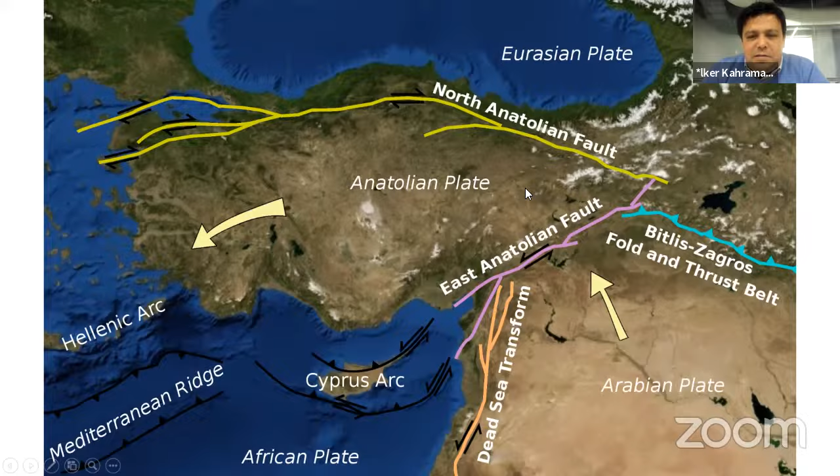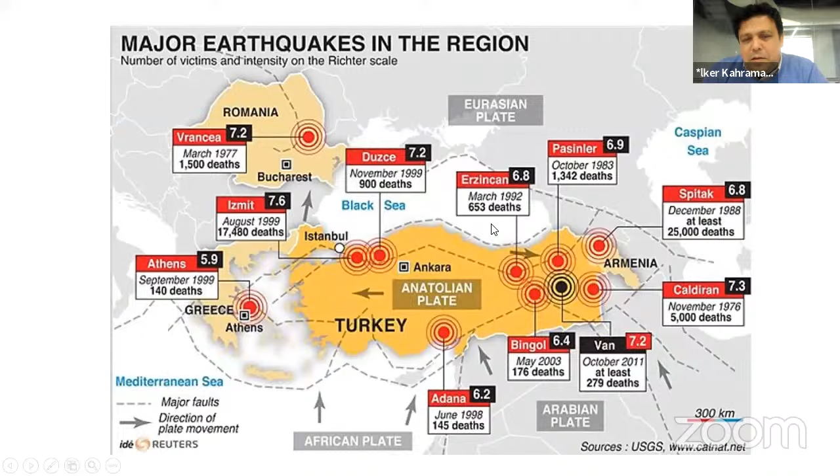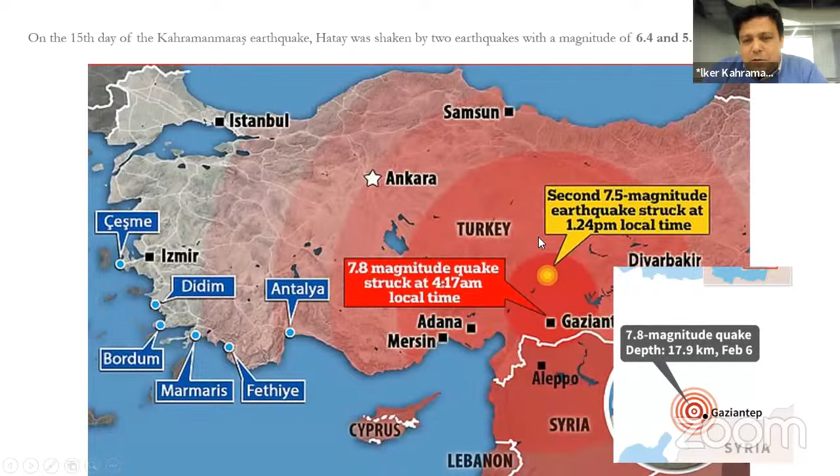Actually, we have some live faults in Turkey, and the East Anatolian fault was bringing the disaster to us. And as you can see, our earthquake zones. And it was not the first earthquake from which we had damage. So we need to learn to live with earthquakes. And we had two really big earthquakes in just a 4 or 5 hour period. And you see 11 cities of Turkey have been affected.

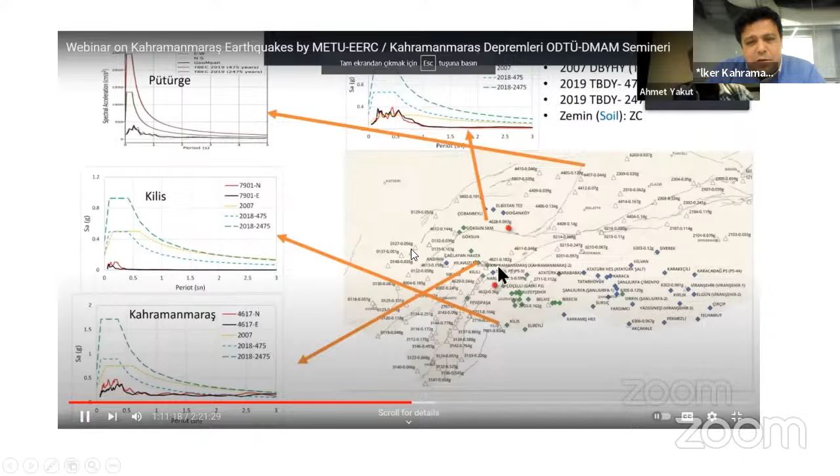And after the earthquake, we were there, but what we realized was really very bad. Now we are still trying to heal our illness, but we have a lot to do. We had a small scale earthquake in Izmir in 2020, and the photos are very similar. And according to lots of different experts in Turkey, our regulations are okay if you just take into account what we faced during the earthquake. But still we are losing lives, and according to the government, it is more than 50,000 people.

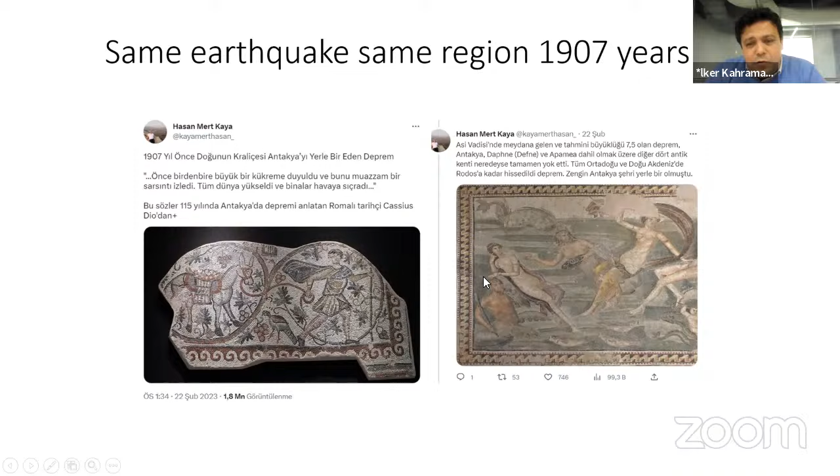And these are some images from 1,900 years ago. It was the same earthquake in the same region. So we know that we are facing it every time. And we have some ruins at the earthquake zone, but we don't want to have them anymore. And if you think about Göbekli Tepe, which is very close to the earthquake zone, we have to understand how to have resilience, because 12,000 years ago we did this in this region.

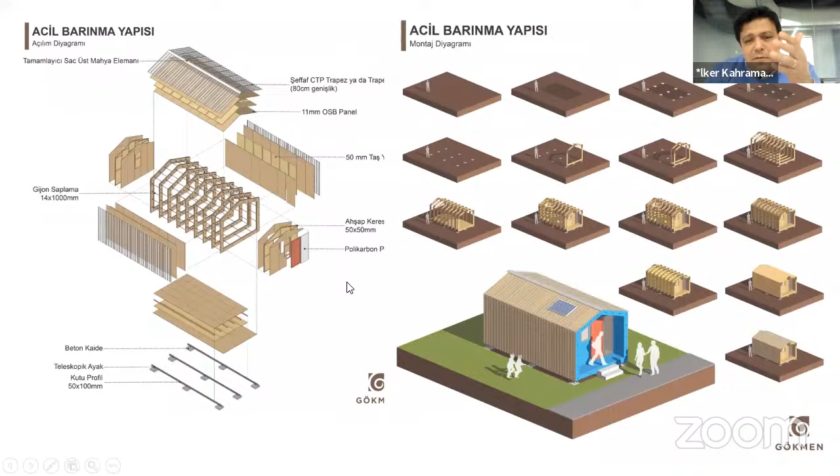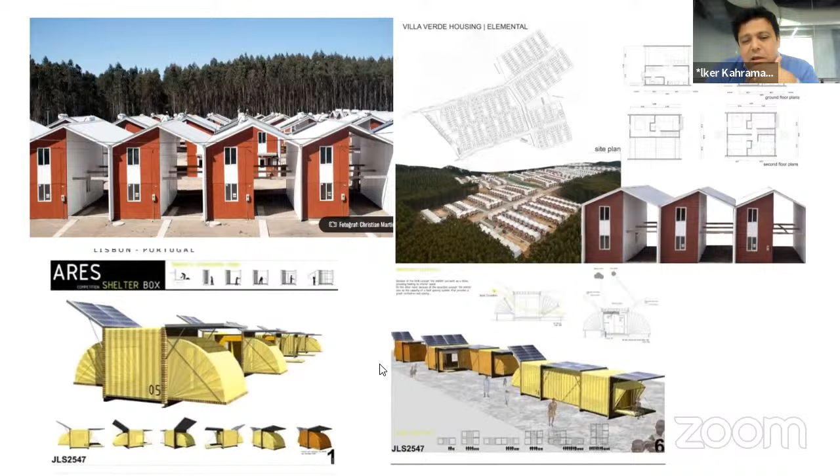And we are dealing with temporary shelters right now. I'm trying to understand what we can do to have temporary shelters, and we are trying to assess what different countries did. For that reason, these presentations will be very beneficial for us. So I just want to leave the stage to Nils Larson. Please, Nils, this is the third meeting we are having all together in order to get an idea about what we can do. And Nils Larson is a very important actor there. So please, Nils, the stage is yours.

Okay. Thank you, Ilker. Am I on audio? Yes, we can hear you. Right, okay. And I'll share screen if I may. If you want, I can share, by the way. Yeah, okay, fine. So we don't see mine yet. There. Okay, we're on. Oh, that's the one you put up. March 20. All right. Do you want me to go on? Hang on, just go a few more slides ahead. A few more. More. Another one. Yeah, okay, so this one is fine.

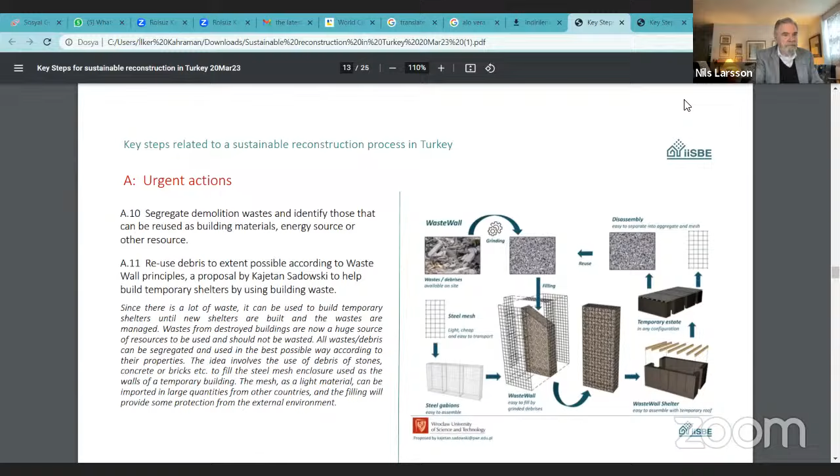Next. Oh, and here, I've mentioned that one of our colleagues, Umit Unver, has helped to establish a zero build organization in Turkey. And that should be a good source of information in the long run on this subject area. Next.

This is what I'm talking about, the synergy zones. Where you have clusters of new buildings, a cluster of 6 to 12 to 15 buildings, let's say, that are located in close proximity, if you start to look at the surpluses and deficits, for example, an office building usually has a surplus of thermal energy, and an apartment building usually has a deficit of that. A school has a surplus of gray water from large roof areas, and a high-rise apartment building or high-rise office has a deficit of gray water. So there are things that can be matched here to make for a synergistic solution.

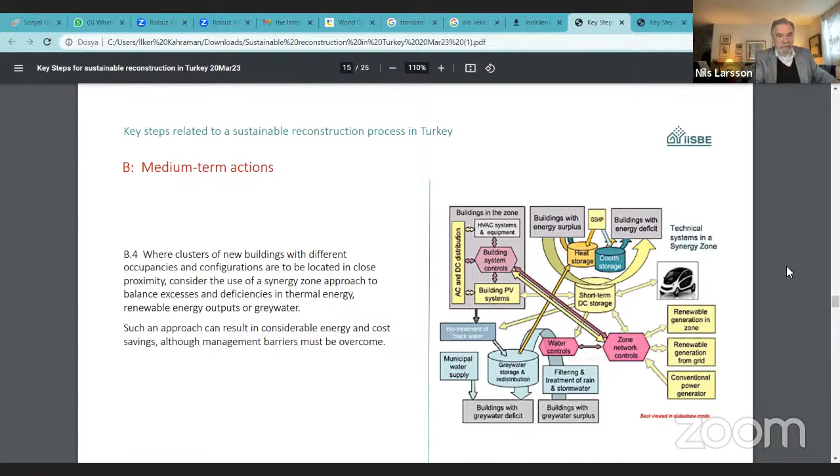We have to, again, obviously, rebuild and repair road, electrical, communication, gas, water, and sewer systems according to the needs of a sustainable urban development plan, with an emphasis on supporting the quality of urban life, reducing energy consumption and greenhouse gas emissions, improving public transport, and minimizing use of private vehicles.

No matter what country you're in, people love their cars. And we have to really, for long-term sustainable solutions, get people to leave their cars and use public transport more. But for that to happen, public transport has to be really available and really high quality.

My wife and I, for example, got rid of our car 18 years ago. We live right downtown in Ottawa, use bicycles, buses, rental cars, and a loan car. We have a person who we exchange with; it's a circular economy kind of thing, where we pay a little bit each time we use her car. It works very well. Establish and maintain databases of operating energy and emissions of buildings and other structures.

Launch training programs for individual workers in small companies to develop skills in high quality and energy efficient construction. In the case of residents who are rebuilding their own homes, which may be in a scattered way, provide small teams of traveling professional support advisors to support these efforts.

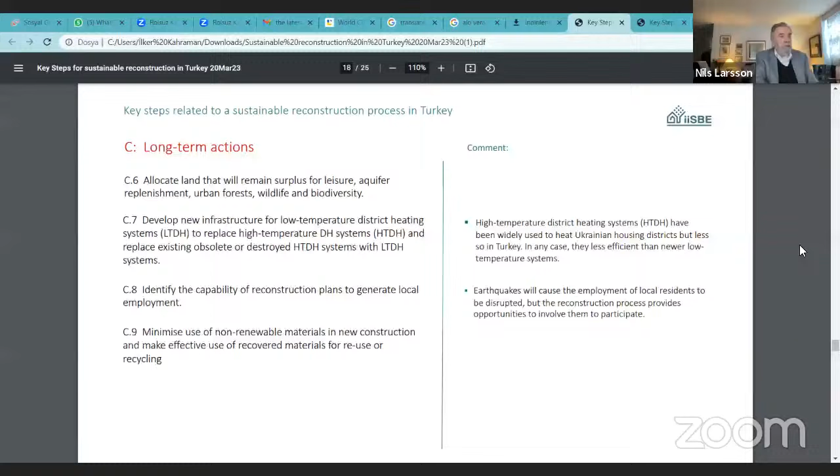Allocate land that will remain surplus for leisure, aquifer replenishment, urban forests, wildlife, and biodiversity. There's a temptation to reuse land that is temporarily vacant for profitable reconstruction, and that's not a good idea.

Develop new infrastructure for low temperature district heating systems to replace high temperature. Now, you don't have much of that. This paragraph I actually developed for the similar work we're doing in Ukraine, where there's a lot of high temperature, very inefficient district heating systems. And I am not sure how much in the way of district heating you have in Turkey, but if you do, then for the long-term solution we have to have low temperature and efficient district heating.

Identify the capability of reconstruction plans to generate local employment. That's another factor. You don't want a lot of outside labor force to come in and build it and leave the locals without work. Minimize use of non-renewable materials in new construction and make effective use of recovered materials for reuse or recycling. Next.

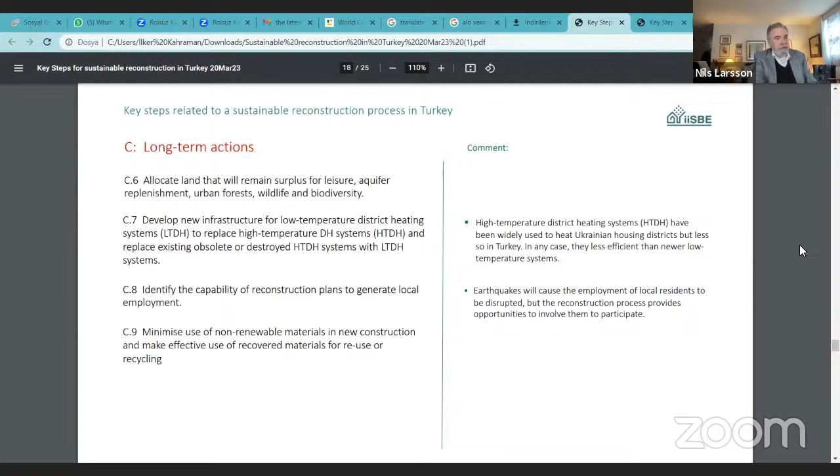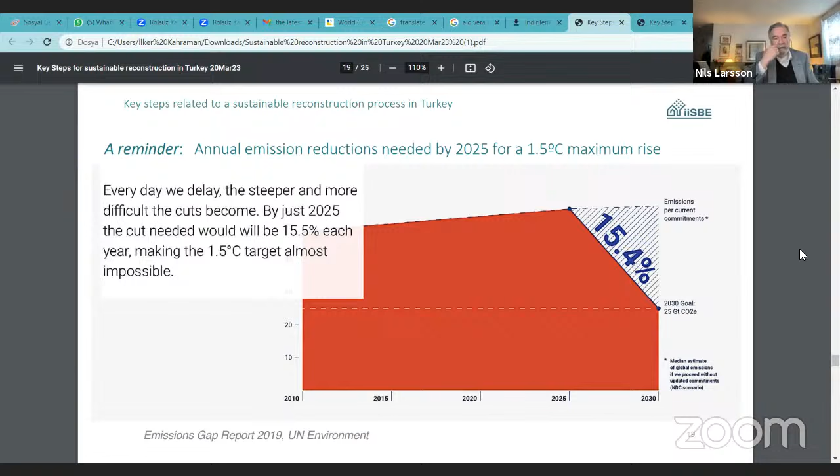Okay, this is a reminder. Each day we delay, and this is the climate change reminder, we have to reduce our emissions drastically, quickly, because otherwise, and the 1.5 Celsius target, of course, is an average over sea and land, and in fact, it's going to be much higher over land. So I think that's it. Or one more. Oh, no, a couple more. Oh, these are appendices. Okay, let's have a quick look at this.

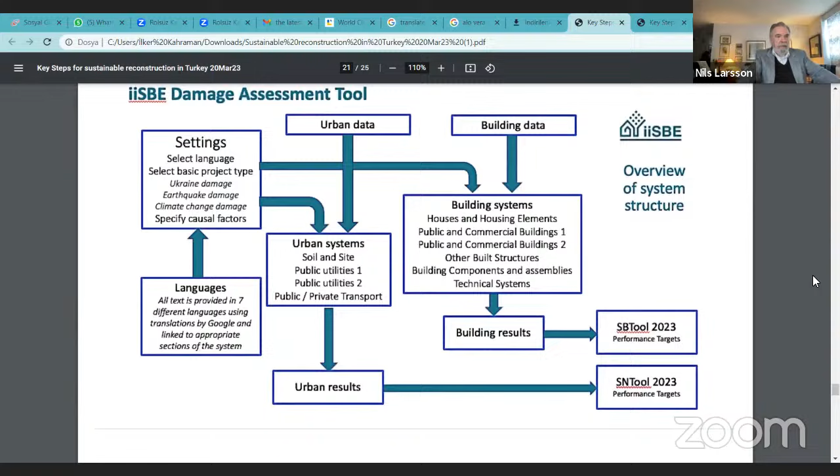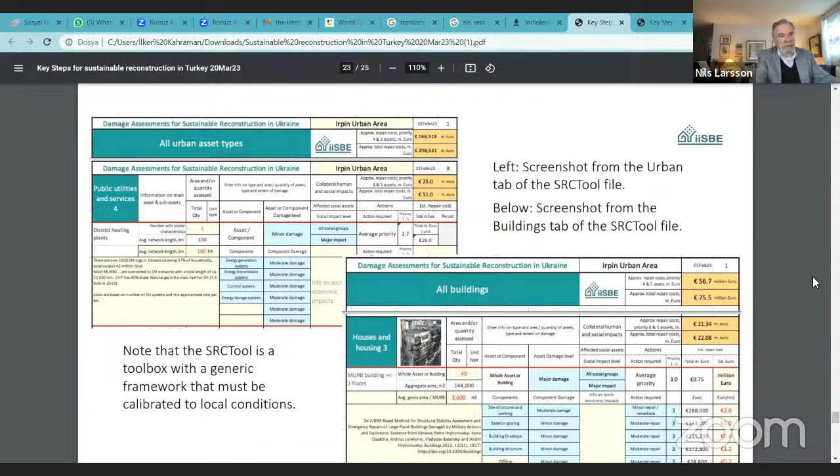And that is, as I say, sketched out, and we hope to get some serious help in making this a real tool that can be used both here and in Ukraine. Next.

Okay, next. Oh, that's interesting. I think that's it. Sorry, I did have a slightly later version of this, which had finished this up, but that's it for now. You can see it's a work in progress, and I hope it's of some use, and I will, of course, benefit from the comments in this session and keep working on it.

Ilker, over to you. Thanks a lot, Nils. I know what you have been dealing with for too many years, and you just showed some examples, and I'm pretty sure that it will be very useful for us to understand what we can do, when we can do it, and with whom we can do it. So I'm really waiting for the workshop and the seminar series to get an idea about what we, as a group of people sitting together here, can go for.

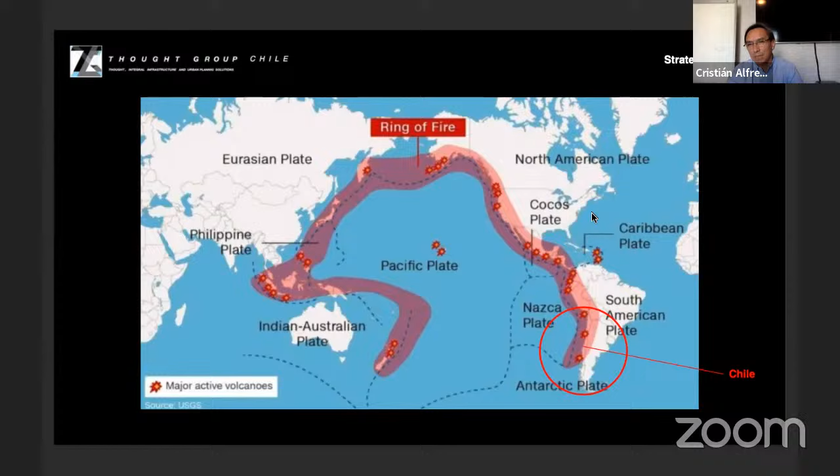So when the Spanish conquerors arrived here in Chile, they didn't find any gold, any silver, anything, just earthquakes, very brave Indians here, and also tsunamis. So this was the forgotten country or something like that, you know, for this time.

So the answer to the why Chile: Chile is by far the most seismic country in the world, a record of which we are not proud at all, of course. From 1570 to date, it has suffered, resisted, and survived 108 big earthquakes and many great tsunamis.

Chile has the record for the largest number of severe and extremely severe earthquakes among all seismic countries around the world. Chile has the highest number of severe earthquakes above 8.0 grades.

Chile has the record of having suffered and survived the largest mega earthquake recorded in human history, Valdivia, 1960, with 9.5 degrees and 10 minutes long duration, together with a great tsunami that devastated more than 1,000 kilometers of our national coast, and which killed people even in Japan.

So its last large registered earthquakes were in 2010 with 8.8 degrees, in 2014 with 8.2, and in 2015 with 8.4.

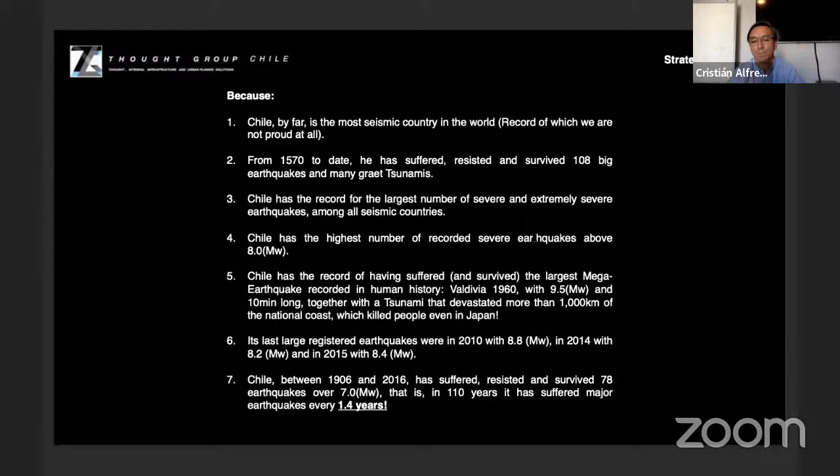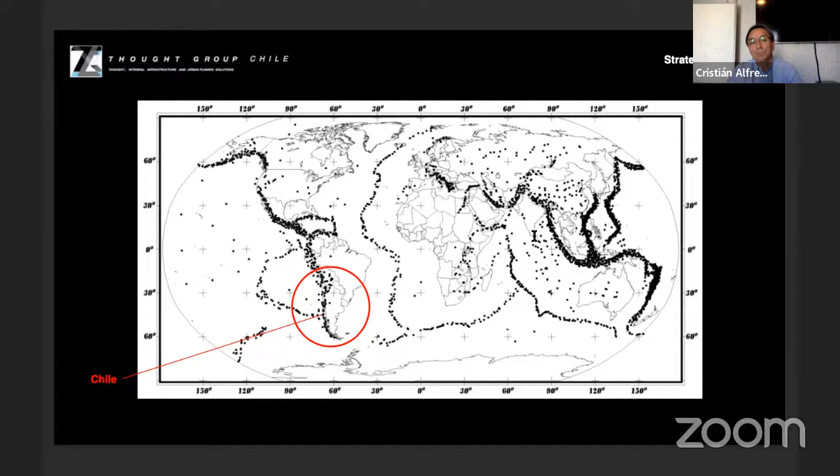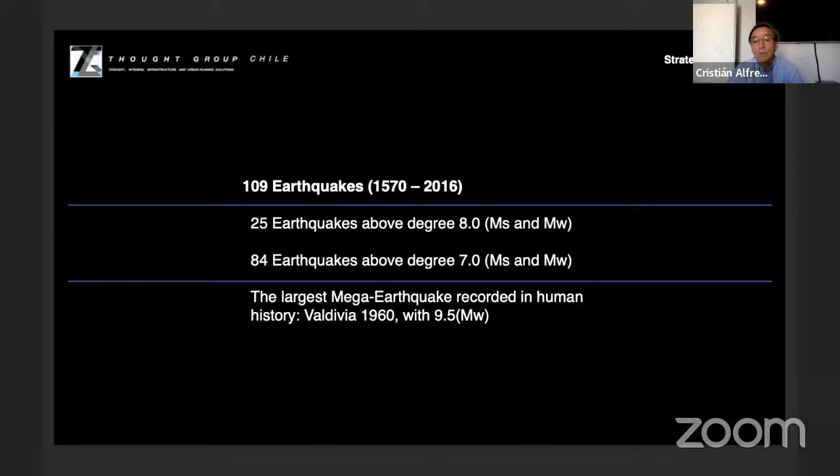So as an average, 109 earthquakes between 1570 and 2016, 25 earthquakes above degree 8.0, and 84 earthquakes above 7.0, the largest mega earthquake recorded in human history, Valdivia, 1960, with 9.5.

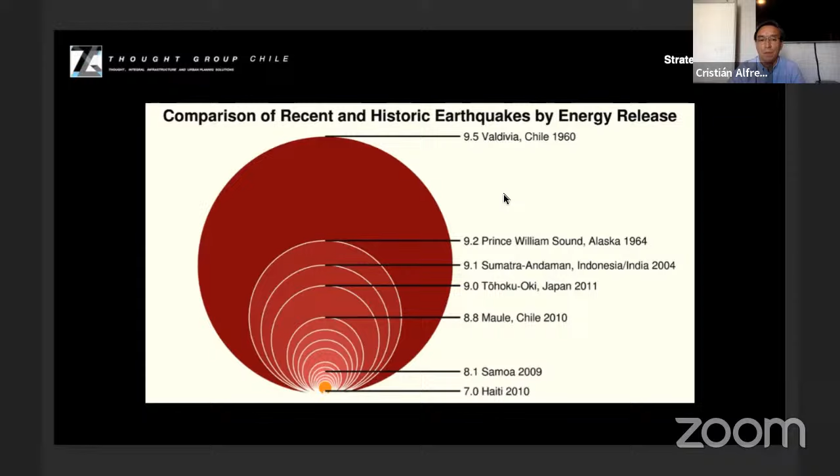So this is the comparison of recent and historic earthquakes by energy release around the world. In the first place, the maximum energy released was Valdivia in 1960, and here as well, Chile in 2010. This is a very good, very clear graphic in order to understand our experience related with earthquakes.

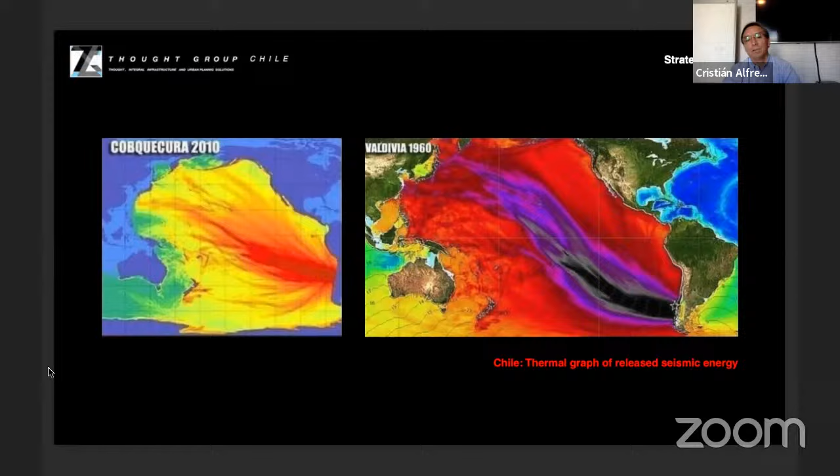Wow. So this is a very nice colored thermal graph of released seismic energy. You can see on the right hand the energy released by the big mega earthquake in Valdivia 1960 and in 2010, and you can see the difference of these terrible experiences.

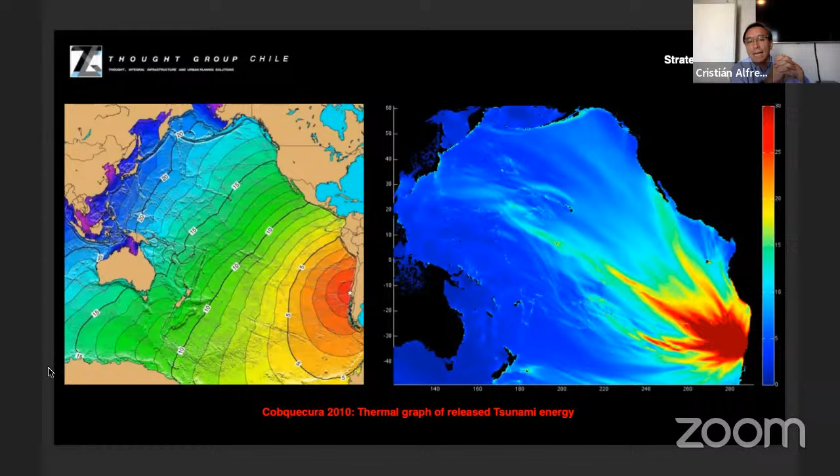So this is another graphic, which is very important. As your country, Chile is a very tsunami-affected country. And this is related with the Cobquecura earthquake, the big earthquake in 2010, 8.8, and the energy released by the tsunami.

So the first answer is the reason to look at Chile as a benchmark. Is it only statistical? No, of course. It is not the only reason. These statistics are just facts of reality. The answer is very simple. The key issue about recognizing the facts is to understand as quickly and efficiently as possible what should be done with those specific facts.

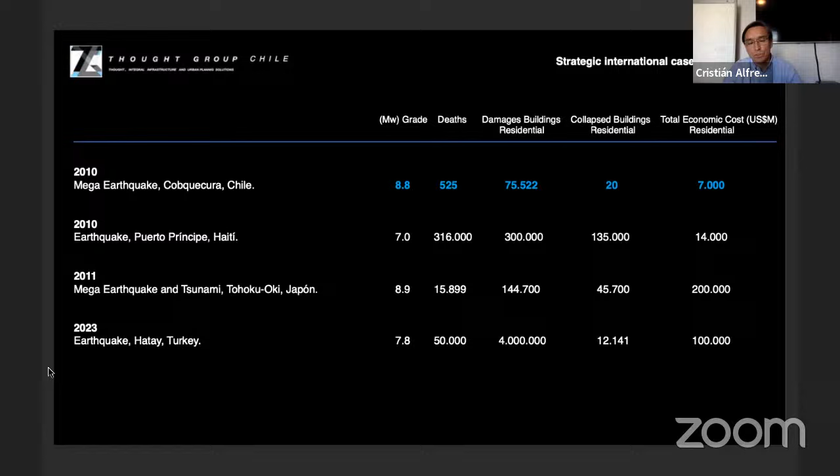And you can see the results of the victims and the damages. And the most important may be the economic cost and also the collapsed buildings in this area. And in the last place appears your very sad last earthquake, 2023, and degrees, etc. These numbers were provided by many sources. So this is an average related to victims, damaged buildings, and probably the economic cost of your last earthquake.

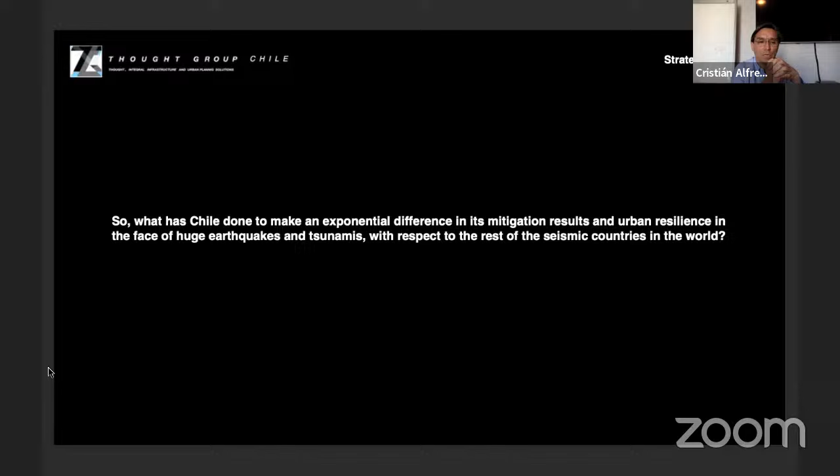So what has Chile done to make an exponential difference in its mitigation results and urban resilience in the face of huge earthquakes and tsunamis with respect to the rest of the seismic countries in the world? What is the reason for this huge difference and the evolution through time, if you analyze all the earthquake history? Essentially, Chile has done 4 strategic things to evolve exponentially in its resistance and constructive resilience.

First of all, the development of a powerful, multidisciplinary, and interconnected seismic regulatory body, which is rigorously reviewed and continuously updated through collaborative work of the public and private sector, the academic world, and the political world as well. Our seismic regulation started with the big earthquake of 1928 in Talca, in the south of Chile. In this earthquake, people understood that we need rules to face earthquakes. So the idea is to build it through time and to update and review this seismic regulatory body constantly.

Second, the construction of a powerful, very effective, and very efficient institutional guarantor. This is maybe one of the key issues of our experience. You have the mixture of private sector institutions you can ask for help, the public sector, with all its corruption, etc., but supervising the private sector in some way, and the inclusion of university institutions to make labs to analyze and understand the qualities of construction materials, with the possibility to certify them.

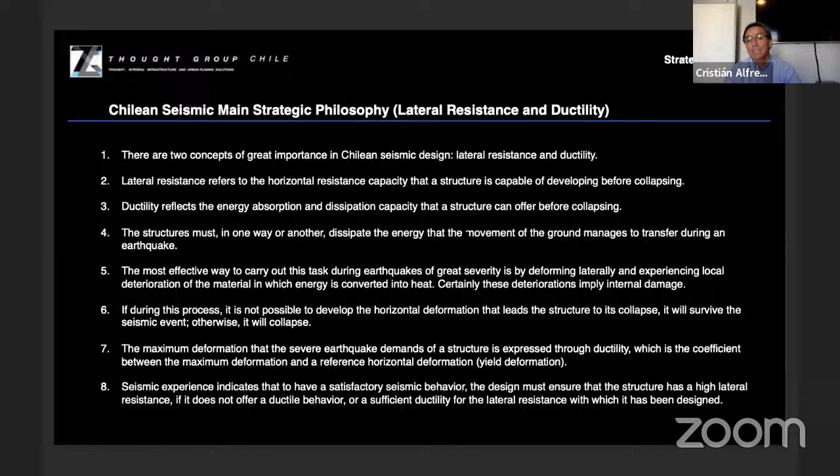Otherwise, it will collapse. The maximum deformation that the severe earthquake demands of a structure is expressed through ductility, which is the coefficient between the maximum deformation and a reference horizontal deformation, the yield deformation. Seismic experience indicates that to have a satisfactory seismic behavior, the design must ensure that the structure has a high lateral resistance if it does not offer a ductile behavior or a sufficient ductility for the lateral resistance with which it has been designed.

So, the higher the lateral resistance the structure is designed with, the lower the need for ductility, and vice versa. Both features involved in the design are related, and the collapses that occur are generally associated with poor ductility provision for the lateral resistance that has been considered in the design. This has been added to the other factors of core regulation and warranty institutionality, the great differentiating elements that largely mark the success of Chile in its process of mitigation and urban resilience in the face of severe and extremely severe seismic events.

The Chilean experience, which until now has been different from that used in most countries in the world, has chosen to provide high resistance and low or moderate ductility. This experience has been very successful in the face of severe seismic events, such as the one that occurred in March 1985 in the central zone of Chile and in the great earthquake of 2010 in the south central zone of the country.

And as a conclusion of that, on the contrary, the method of providing high ductility associated with a low or moderate lateral resistance, as advocated in countries such as Japan, Mexico, New Zealand, USA, and many others, has turned out to be very ineffective. So this is science, no?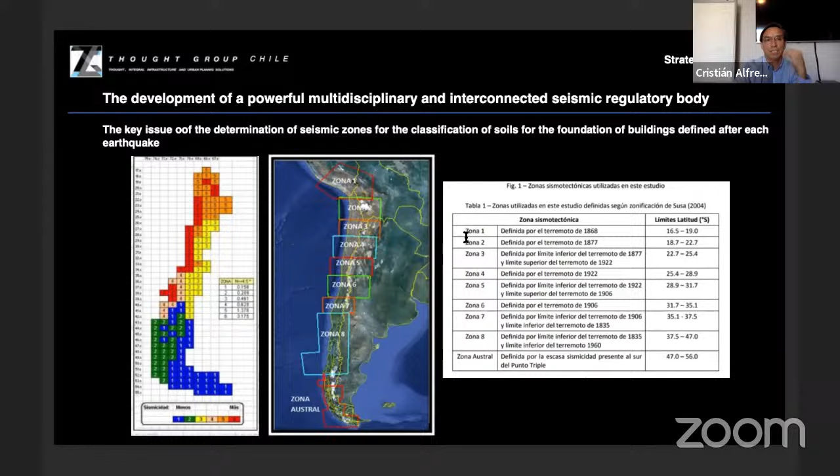So this is related with the construction of a powerful, very effective and efficient institutional warrantor, a powerful core. First, the INN, which is an institution related to producing regulations about everything here in Chile. But this is the main institution to produce seismic regulation after a big process of discussion between social parts, the engineering college, the architectural college, and many other groups of people related with seismic resistance strategy.

So when INN has a new normative or a new regulation, it immediately informs the Ministry of Housing and Urbanism and also the Ministry of Public Works in order to transform these studies into law, into effective regulation, and then go to the National Congress to be law, but also informs the Comptroller General of the Republic, which is a very powerful institution here in Chile, whose main role is to enforce compliance with every regulation here in Chile.

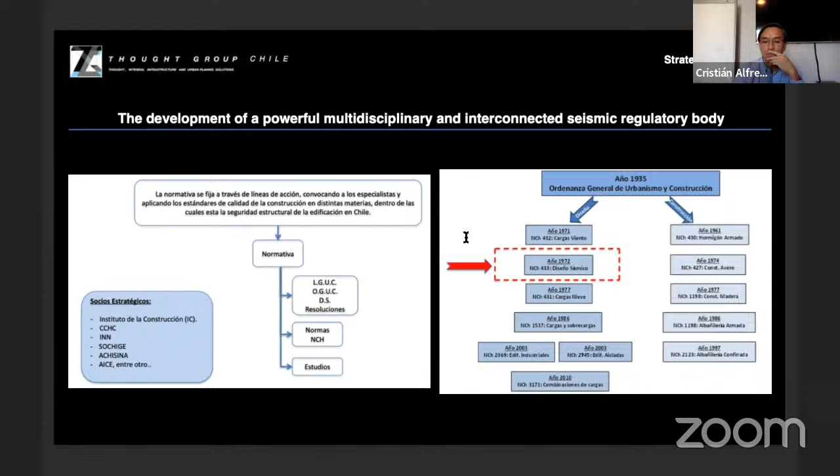And even with international experience. For that reason, I really want to visit you in Turkey as soon as possible in order to understand many things, because pictures and videos are not the same for understanding this. And to understand the requirements or specific needs related to the seismic regulatory body that you need.

So this is another revolution, and the last one, with modifications and evolution of each code normative, all related to law by Congress and supervised by this national controller regulator. Okay, so the conclusions.

From the seismological point of view, one of the most valuable lessons that earthquakes teach us relates to the information that allows us to evaluate the behavior of our buildings at a natural scale against real loads. Give priority to the management and application of the concepts of lateral resistance and ductility in the structural calculation process.

Historically, buildings in Chile have been increasing their good performance in the face of the different events that have occurred in the history of our country, mainly due to the improvements and advances being generated in design and construction regulation. Regulation in Chile has been in constant evolution through a process of continuous improvement over time, by many actors from different spaces of our society.